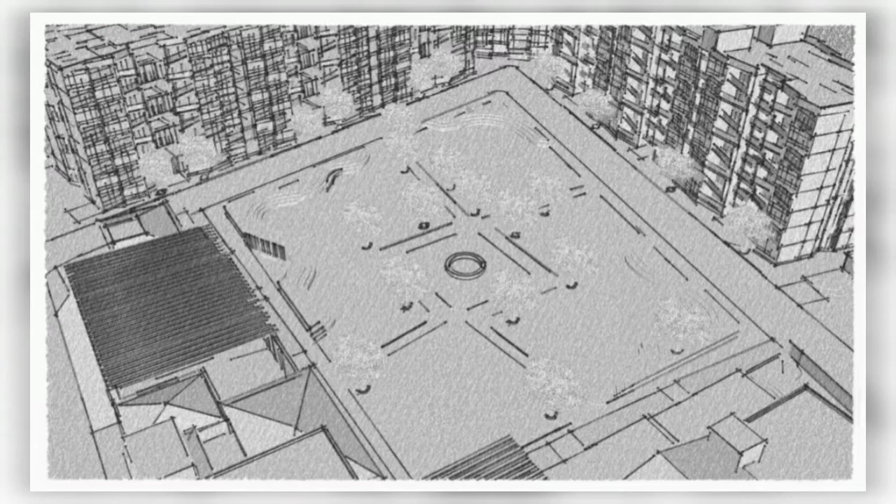Hello, my name is Siddhi Devale. I am an architecture student studying in third year from Idea College, Nashik.

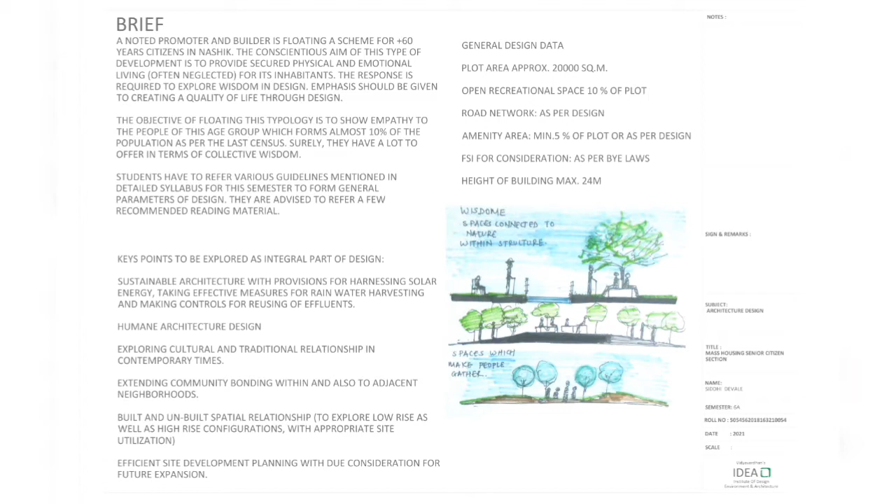My topic is to design a mass housing scheme for senior citizens. The brief talks about designing a scheme for 60 plus year citizens in Nashik. The aim for this type of development is to provide secured physical and emotional living spaces for its habitants. The response required is to explore wisdom in the design. The spaces should emphasize creating a quality of life through design.

The key points to be explored as integral parts of design are: number 1, sustainable architecture with provisions for rainwater harvesting, solar energies, and reusing of effluents. Number 2, exploring cultural and traditional relationship in contemporary times. Number 3, connectivity, that is extending community bonding within and to adjacent neighborhoods. Also, efficient site development planning with due consideration for future expansion, and building and unbuilt spatial relationship.

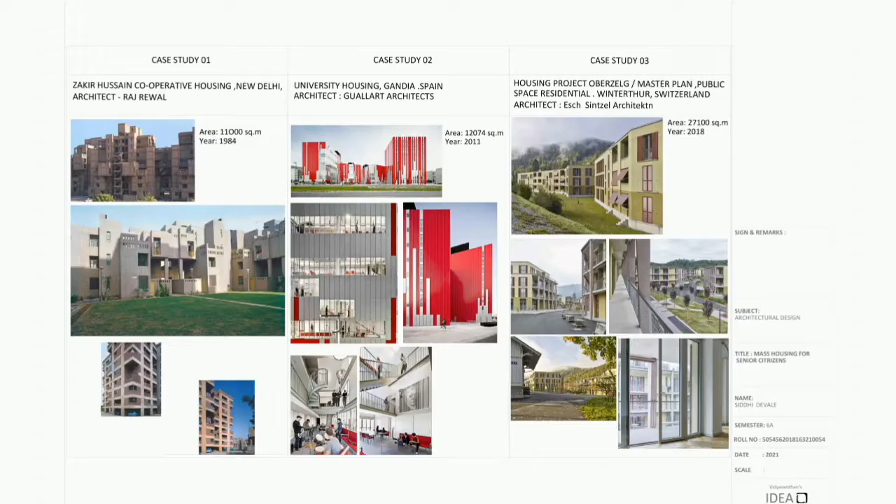So I chose three case studies which have different culture, climate, and typology of structure. First was Zakir Hussain Cooperative Housing Society, New Delhi by architect Raj Rewal. Second, a university housing in Gandia, Spain by Guallart Architects. And third is the housing project in Switzerland by Esch Sintzel Architekten. The three structures are different by area and the climatic condition of the site.

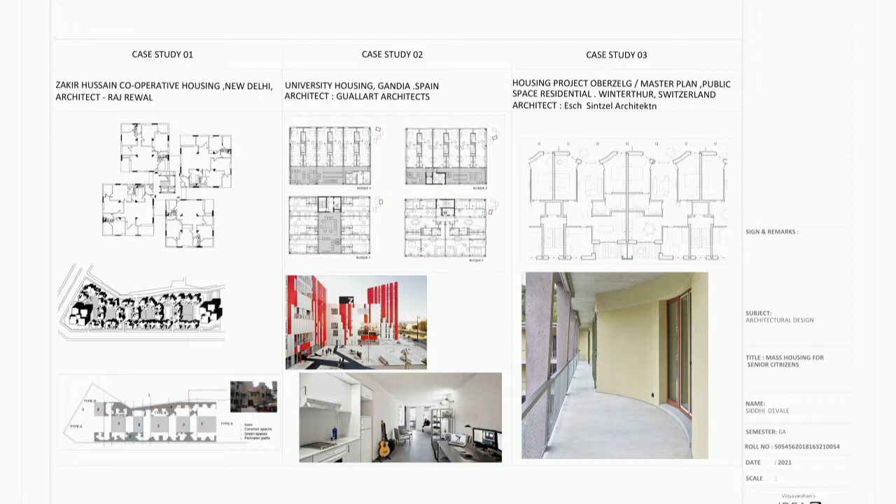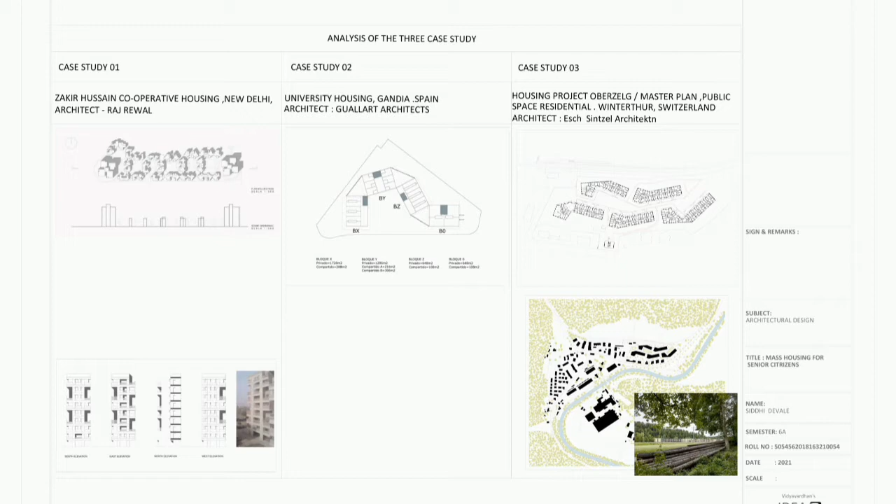This particular analysis of three case studies in terms of plans, site, sections, and everything gave me an idea to design my scheme for housing of senior citizens.

Site analysis. The site is located in Nashik near Vadaya Pathadi Road. The site is quite plain and flat land. Towards the west side, there is already an existing property connected to the site, and on the eastern side there is a small yoga center.

The site is connected to the highway, and on the opposite side of the site there is an existing developing area. At a distance of 1 kilometer from the site, there are facilities such as hospitals, schools, airports, petrol pump, and market area.

As Nashik is a hill station, the climate is quite cold, so the summers are warm, the winters are cold, and there is heavy rain during rainy seasons.

As per the brief, only 50%, that is 20,000 square meters of the site, is to be used for the development, and the rest of the site is to be left for future expansion. The part of the site chosen for the scheme is the front side, which is connected to the internal road and the highway. Hence there will be ease of access.

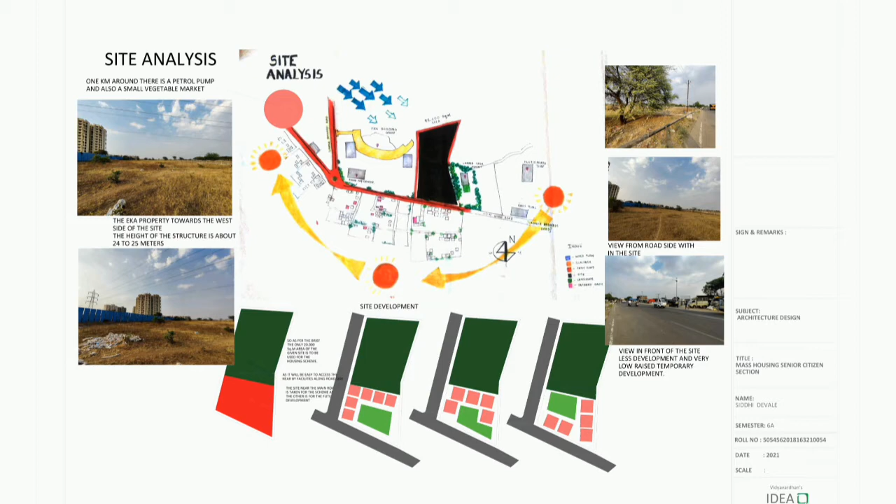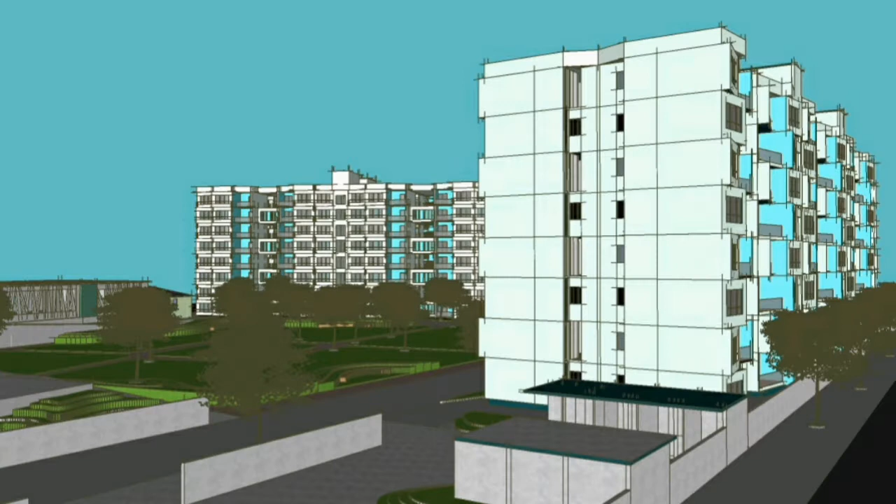So the concept is, there is no concept, but considering good vision, the access should be easy and proper. A number of interactive places should be created, especially for this typology of people, that is 60 plus, understanding their particular way of living and their requirement. Also there should be proper maintenance of hygiene.

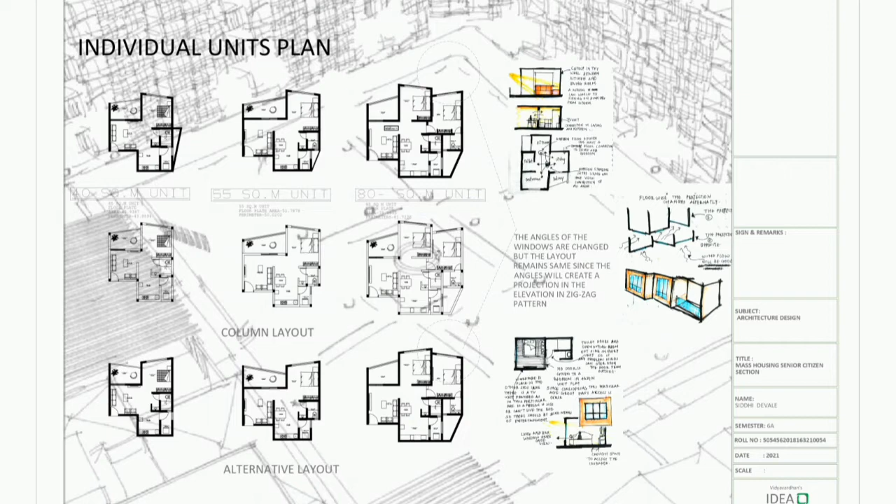The other row is the alternative layout, in which, since there is no change in the layout, the change is made in the projection of the unit, that is in the balcony side and the room side. A box window is provided for every single unit since the vision is quite clearer than the regular one.

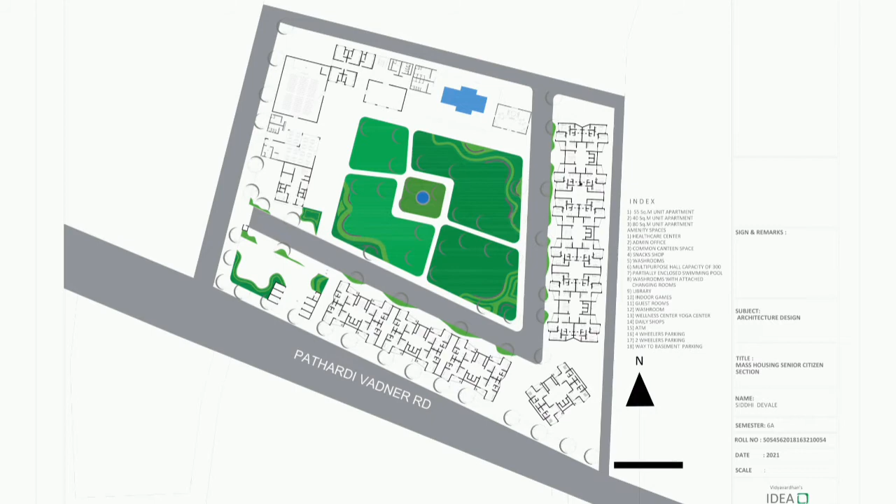There is a common canteen area with capacity of 100 people, a multipurpose hall with capacity of 300 people with a common toilet. Then there is a small guest house, an indoor game area, a swimming pool, a yoga room, and a library area is provided. To reach the amenity spaces, there are ramps provided.

This is the view of the green space from where a swimming pool and library area is seen. There are two ramps running from the opposite side through the amenity spaces.

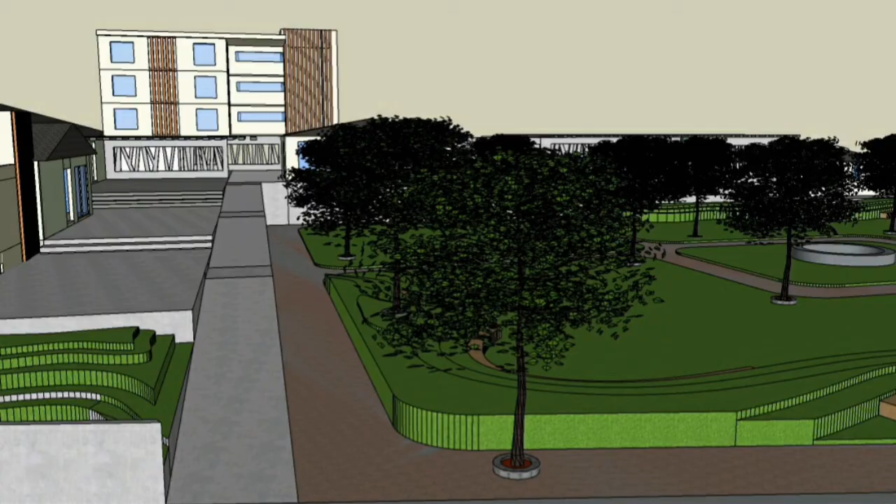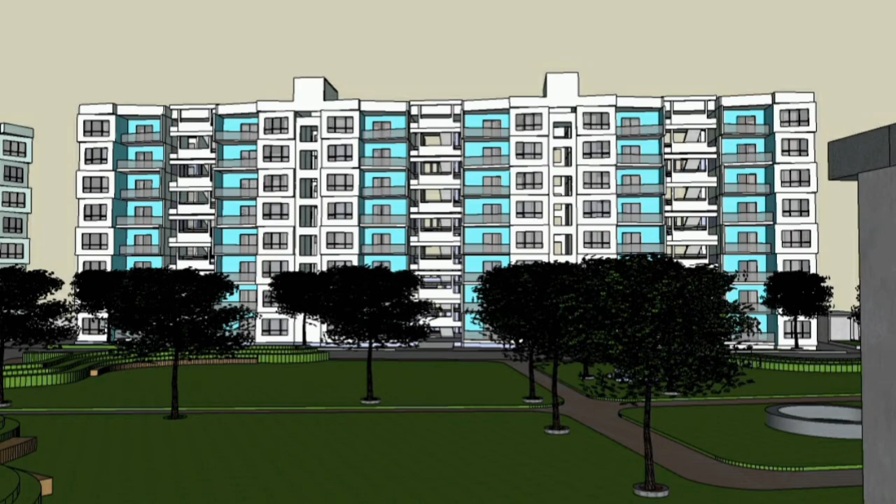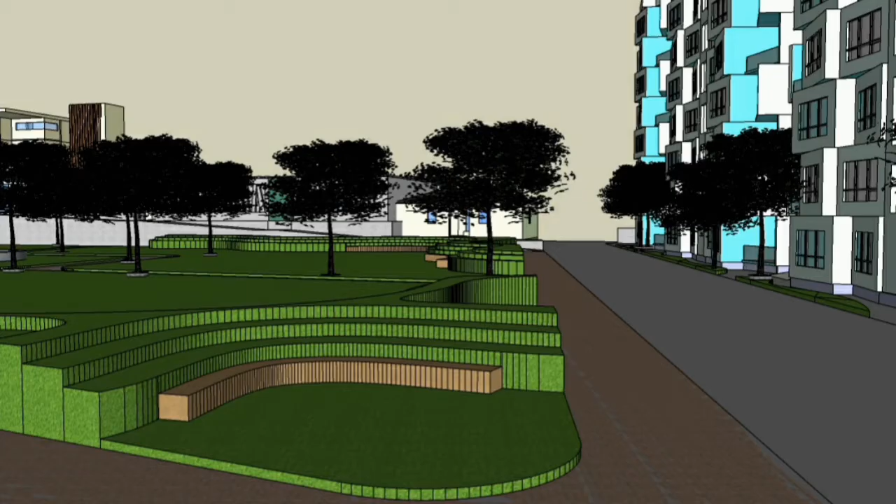This shows a 9 meter wide road surrounded by trees and green space leading to the 80 square meter unit. This view shows the 80, 40 and 55 square meter units.